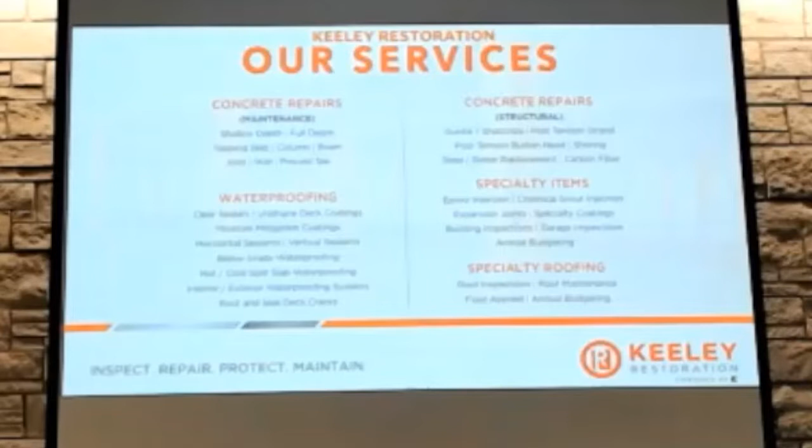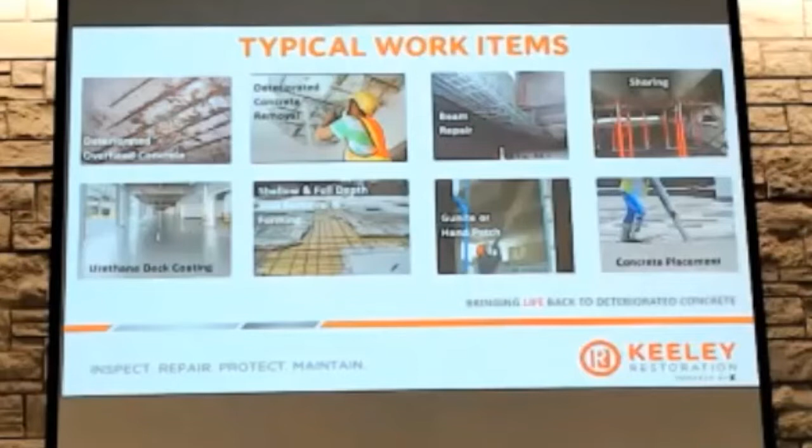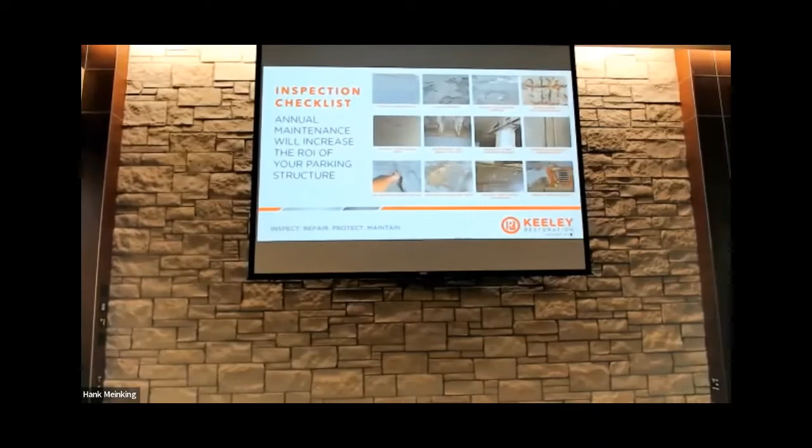Here are two slides on some of our typical concrete restoration projects. Pretty much everything you see is really due to some type of corrosion or lack of maintenance in most cases, which we'll get into more tonight. There's one slide on protective coating in the bottom left. A lot of this starts with us going out and taking a look at a parking garage or structure, identifying the different conditions that exist, and those conditions generally lead us to the next step - usually some type of restoration and then a maintenance program.

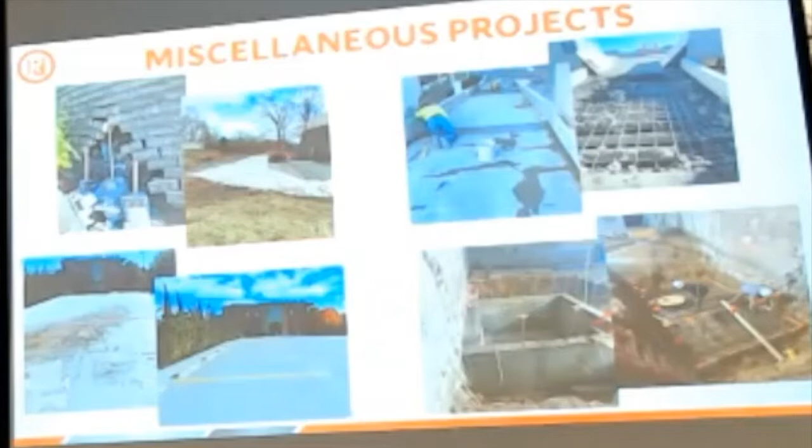The project at the top still has to do with some type of water problems. This particular retaining wall was having issues because the drainage system was undermining the footings, washing the concrete out, and causing structural problems with the wall. So we came in and created a new wall - built a steel cage, shot gunite, air-placed concrete, stabilized the wall, and put in a new drainage basin.

Over here is a typical condition we find where the concrete's deteriorated and the steel is deteriorated. We have to remove the concrete, put in new steel, form it, pour new concrete, and put a protective coating on. This particular owner was doing maintenance - had a protective coating on for probably 10 years - and decided to do another coating on top of that to continually maintain the facility and get a new warranty. That's just some typical concrete work we do.

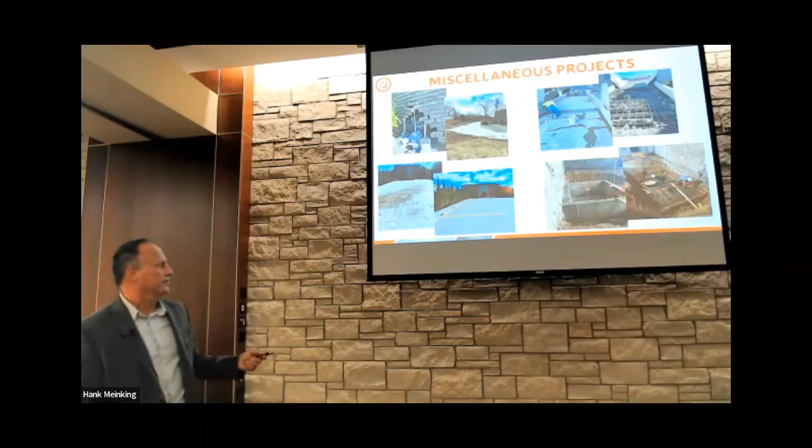So enough about us. Let's talk a little bit about the concrete business in general. Why is concrete restoration a multi-million-dollar annual business?

Let me preface this: if you guys have any questions about my statistics, it all came from Google, so you can check that anytime you want. But an estimated 9 billion yards of concrete was placed over 20 years ago.

So there's a lot of concrete out there that's old and needs repairs, especially structures that have had minimal or no maintenance. And right now they're estimating over 500 million yards of concrete placed every year. This is going to continue—there's a lot of old concrete out there, and we continue to place more every year. Therefore it's estimated as an $18 to $20 billion industry as far as the restoration industry in the U.S.

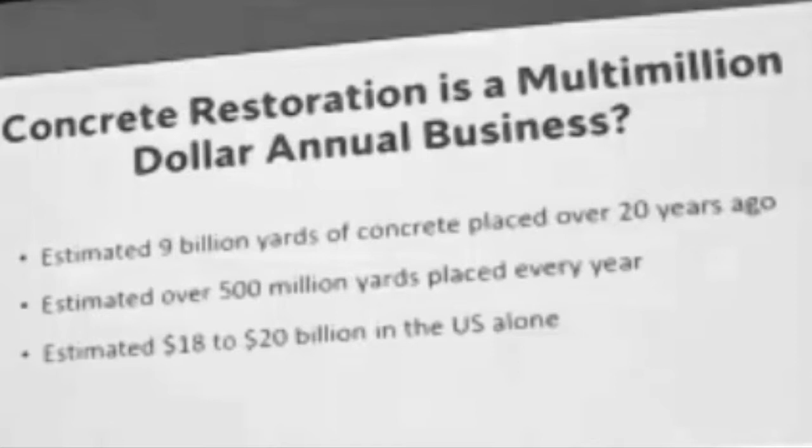We look at it as it all starts with new construction. The point of new construction really determines the quality of the project and how well it's going to last. We're really starting out assuming it's a good design, so as far as we're concerned the design's good, and now it's going to be about the installation.

We think there are opportunities at the point of installation where, with a good inspection process, some of the problems we generally see can be minimized and save the owner a lot of money down the road on the restoration side. Some of the three main areas of concern we find in a garage are going to be concrete cover.

We all know that there's a certain amount of concrete that needs to be over the steel to protect it from water, salt, etc. The other is over-finishing or the mix.

If you add too much water to that surface—and a lot of contractors like to put a little extra water on there to finish it—that creates problems. And the last was...

The drainage piece. Where's the drains? There was a plumbing company up in Omaha, Nebraska, where I'm from, and I'd always ask them, say, Dan, what's the problem here? How come there's always ponding water in the garage? Is it the drain's too high, or is the concrete too low? Is it the plumber's fault or the finisher's fault? And of course he always said it was the finisher. But there always seems to be drainage problems.

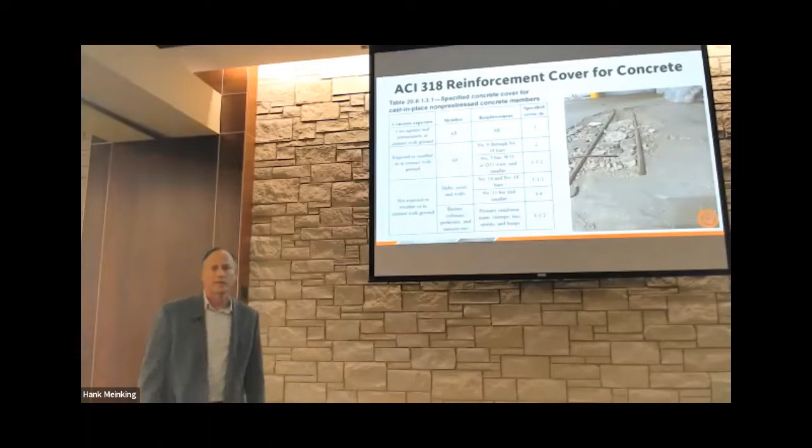ACI calls for a certain amount of steel coverage, and in most cases they're asking for 1.5 to 2 to 3 inches of coverage. You'd be surprised how many projects we find where the steel is only 1/2 inch to 3/4 inch under the surface of the concrete. This certainly could be caught at the time the project is being constructed, and becomes a big problem for an owner down the road. There are a lot of old parking garages out there with minimal coverage. I think people do a much better job now on quality control and inspection to minimize that problem.

In a typical garage we'll see ponding water, whether it's from the drainage slope in the concrete or the actual drains themselves—maybe not enough drains. A lot of times owners will have us come in and look for core holes in the concrete and add auxiliary drains to try to get that water out and displace it so you don't have the ponding water.

I guess another issue during new construction—these are things that really can be inspected and minimized to help prolong the useful life of that structure.

And then the scaled concrete—we've all seen that cement truck out there, and the guys putting a little more water in and spraying it. You put too much water on the top, it changes that cement ratio, and you have that problem. So those three elements, I think, we find on more garages than anything. There are certainly other problems, but those are probably the three main ones we see that contribute to corrosion.

So let's talk a little bit about the concrete material itself. Concrete as a building material absorbs water, it's porous. It gets hard, it shrinks, it cracks. And the last one—it lasts forever, right? At least that's what we all thought. Concrete lasts forever, and a lot of people felt that way, so they didn't do a lot to maintain it.

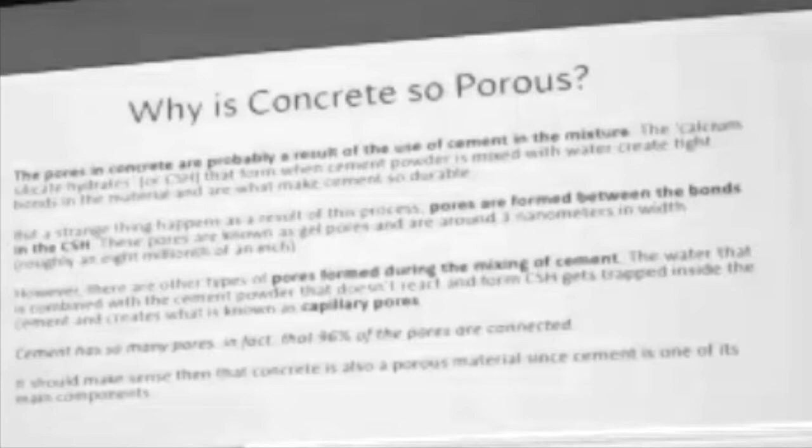So what's the best friend for a concrete restoration contractor? All these cracks. If concrete is porous and it's going to let water in over a period of time, what's going to accelerate that is all the cracks in the concrete, and you'll get cracks in there for a variety of reasons. However, if you don't address the cracks, it just allows the corrosion process to start in and accelerate by letting the water get in.

So an owner could really minimize the problem by taking care of these cracks and having some kind of maintenance program.

This gives you an idea of a cross-section of the concrete and the steel itself, so you have your nice new concrete with no problems. Then as moisture starts to get into the concrete, for a variety of reasons we saw above, you can start that corrosion process.

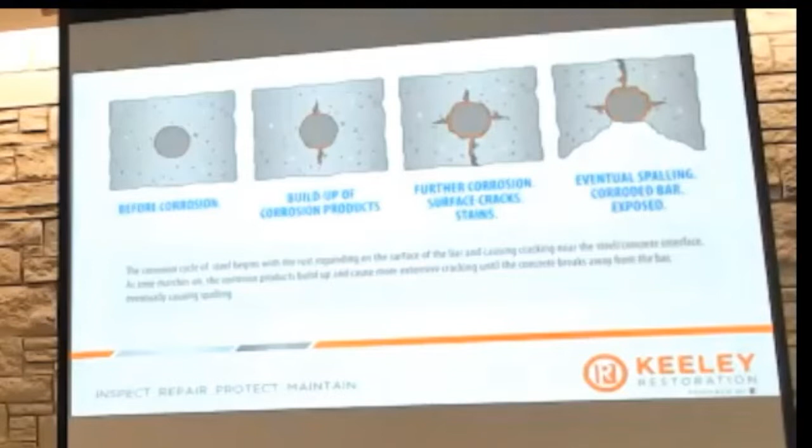Eventually, that steel starts to rust, and as it does, it creates a force that's stronger than the concrete, and then it creates these spalls. This happens to be a downward spall, but you'll have an upward spall as well, and that's pretty common in the industry.

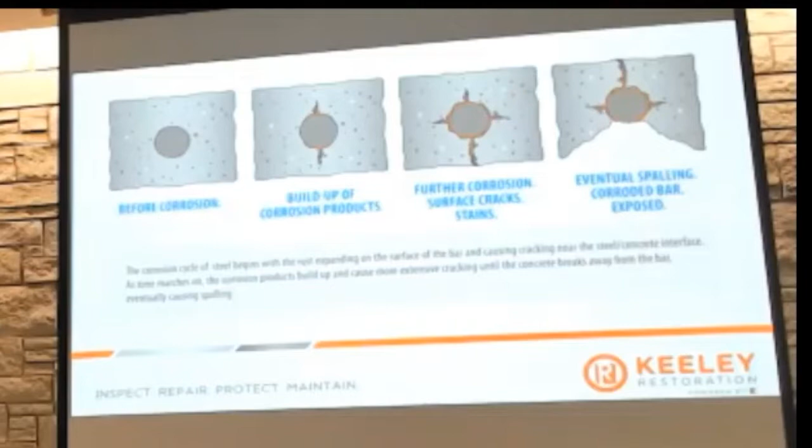So then you say, well, what can we do about it? Why is that such a problem? It's really accelerated if you're in the Midwest or on either coast - look at the environment we're in. As soon as it snows in the Midwest, we bring salt trucks out, the trucks put salt on the street, the cars drive through it and come park in the garage, the snow falls, and now we basically apply chloride to the garages.

And then you get the ponding water, and it sits there, and eventually it works its way into the steel, the same process we saw above continues. You find the same thing on either coast with the salt air.

There's a lot of balconies out there. You go down to Florida, and you're going to find a tremendous amount of concrete restoration work due to the same principles - salt and chloride being introduced to the concrete. I talked to a gentleman at Sika a while back about where their business is, and their biggest market is New York, with one of the top 2 or 3 other markets being southern Florida. I thought, well, why is that? The population in California is pretty large, so why wouldn't that be in the top 2, 3, 4 areas? He said it's due to the number of buildings that you see in Florida.

In Florida, the buildings look like this. In California, they've got mansions sitting on the hill, so you don't have as much concrete exposed. You might have a bigger population, but the actual structures exposed to the salt and chloride is higher in Florida. Therefore, we sell a lot more repair mortars. Did you know that?

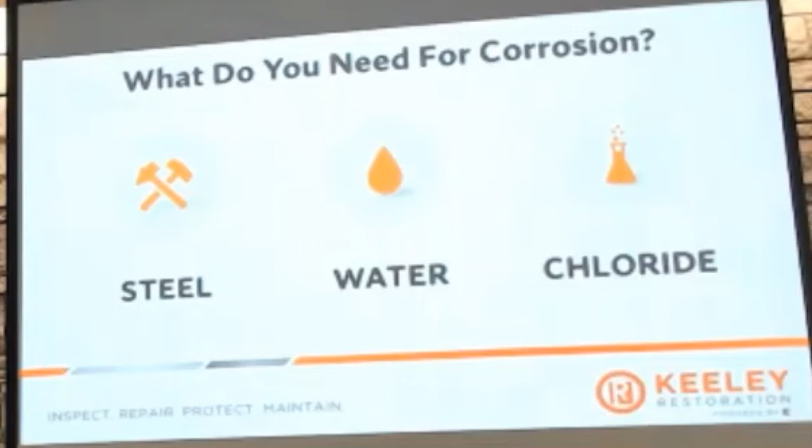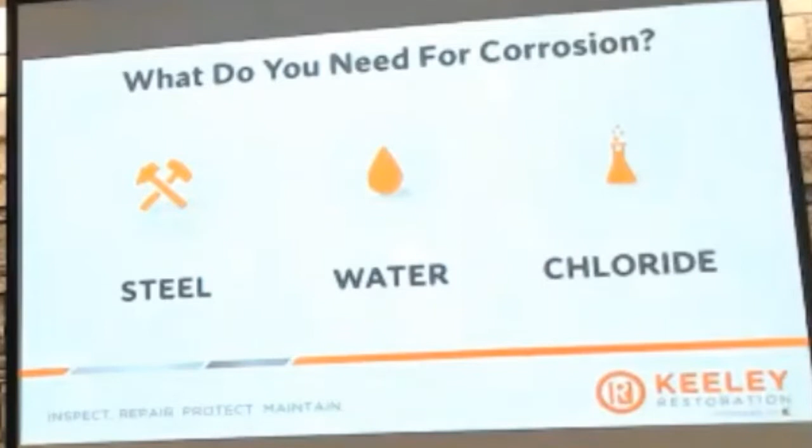So we talk about what do you need for corrosion. I guess we all know what that is: steel, water, and chloride. Are we really doing enough to minimize the amount of water and chloride that gets into the structure? The steel's already there, you have to have it. The concrete doesn't perform, the structural concrete without that steel doesn't perform well, so you have to have it. And then if we can't keep the water out and the chloride out, the corrosion process is going to happen.

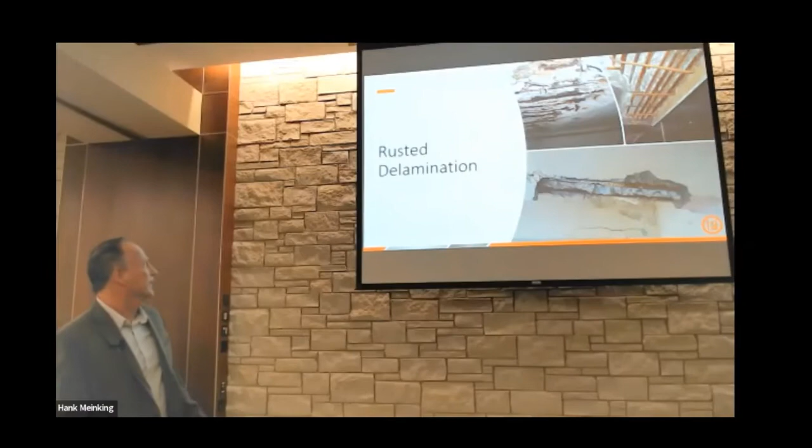So really for us, if you want to talk about maintenance for an owner, this is the process they really have to focus on. Because at the end of the day, you get the rust, you get the corrosion, and this is typically what you'll see in a garage if the owner does no or very minimal maintenance. And I can tell you this is common in any city that basically has salt trucks and uses chloride, you're going to see that in almost every parking garage in any city.

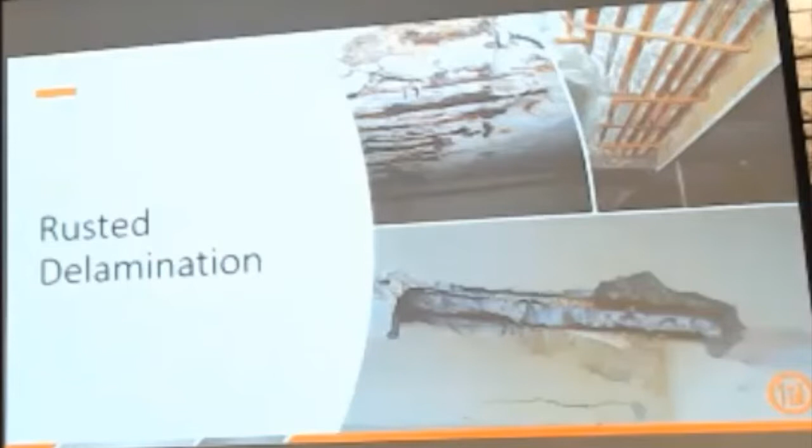And I can tell you, in St. Louis, I could probably name half a dozen garages that look like that right now. And then you wonder, should you be able to park there? And it's amazing that...

I guess from a design side, what's the factor of safety? You're going to add times 2, times 3, but they seem to perform, and the engineer comes in, creates a spec, bids it out, fixes it, and actually the garage performed very well after that.

So really, our goal is trying to reduce the corrosion process, and by doing that we need to reduce the moisture, the exposure to the elements, eliminate chloride, and then somehow protect that concrete.

So how do we do that? How do we go about reducing the moisture? Concrete is porous, so you're really not going to change that. So you have to make it so that it's less permeable. So how do we keep the water from getting in?

Some of the things that we found that work well - I think the industry knows the number one thing you can do is probably right here: the annual inspection. So if every owner were to go out and walk their structure, I don't care, as a homeowner, you really need to do the same thing.

You're going to have problems with your home where water gets in your roof, your windows, etc. These buildings and structures are no different, but some owners do a great job of inspecting their facilities, or they call an engineer to come out, or they call a contractor to come out. But the number one thing to do is inspect the facilities and find out that you have a problem.

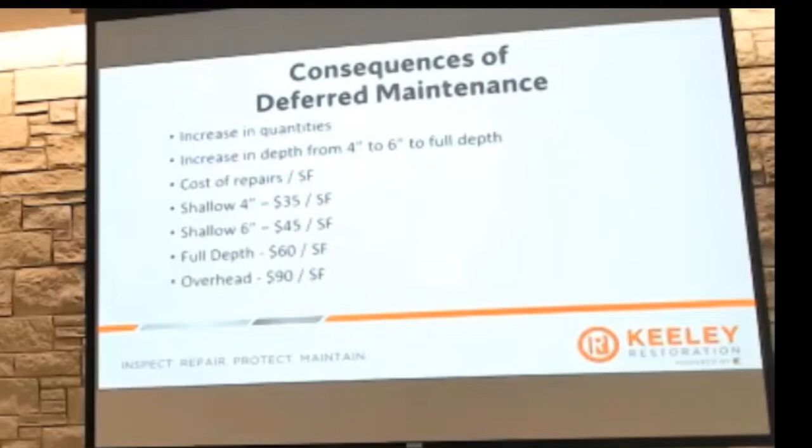So here's an example: a shallow depth repair would be here, maybe at $35, and they're waiting longer, and it's getting deeper here, this would be $45. Unfortunately, now that you have full depth repair, that's the $60. If the owner would have performed maintenance before it was this severe, maybe they could have minimized the repair cost by not having to do the full depth repair.

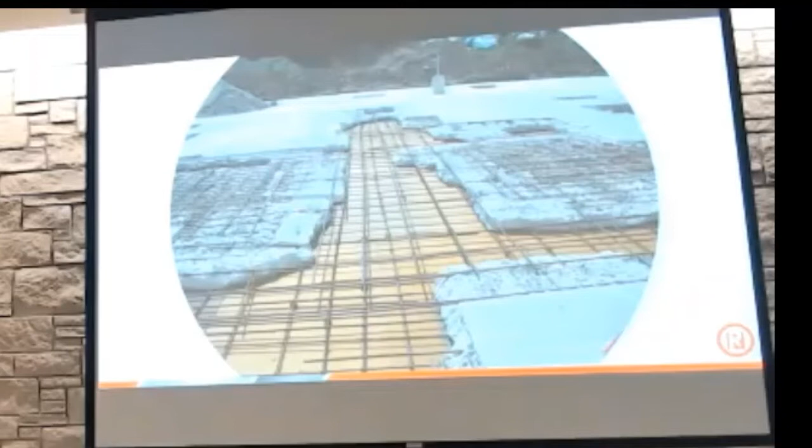At some point, with that full depth repair, or maybe even less than that, don't you run into having to replace the rebar? Absolutely, and that's got to be part of it too. There's a certain amount of cross-sectional area, if the rebar is gone, then they make you take that out, and then there'll be a lap length on the rebar. Sometimes if it's corroded at this point, you have to come back and get good steel and have a certain lap length on the steel. But yeah, it gets very expensive, and they'll come back with green steel and coat it with epoxy or some type of rust inhibitor.

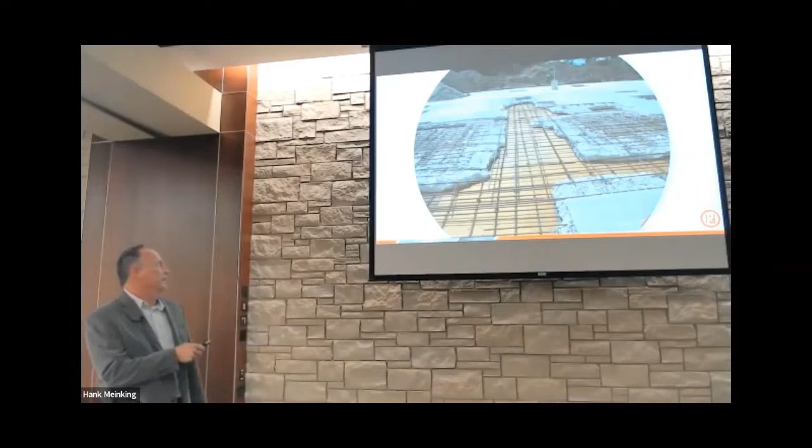As you can see, the amount of work that goes into it increases, and of course the price of the repair increases. Then the ugly one you don't want to have is this soffit repair on the bottom side, and that's the $90 repair. In a lot of cases it's just cheaper - if this here is going to be 35 or 45, and the bottom repair is going to be 90, now you're over $100 some for the repair. You're better off going back and just doing a full depth at 60.

So in some cases, you don't want to do a shallow and a soffit repair and try to leave a couple inches of good concrete. It's just cheaper to take it all out, form it up, and have a monolithic pour, not having patch on a patch, which happens a lot as well. So here are a couple case studies or situations where we've seen lack of maintenance become a bigger problem for the owner.

For instance, right here is an expansion joint, and on this side of the joint is a building, this side's a garage, so you've got a beam on each side below holding the building and the garage up, and the drainage in this garage runs this way. We talked about drainage earlier and how important it is. So on this top deck, when they throw the salt out there and it rains, all that rain and chloride runs down here.

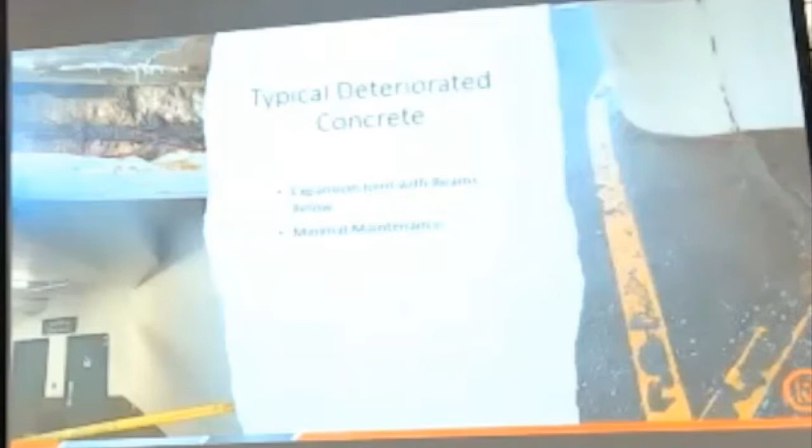You have this open joint that runs down, and right below the joint is this beam line. There's probably only 50 feet of joint there that could have been a $100,000 fix, and now you're going to have a couple hundred thousand dollars of concrete repair, not counting the shoring. You have to have an engineer come in and figure out the loads for the building and garage and shore that up, because you're going to expose most of that bar, and the beam isn't going to be able to perform. It's going to be quite costly just due to the fact that they didn't maintain it.

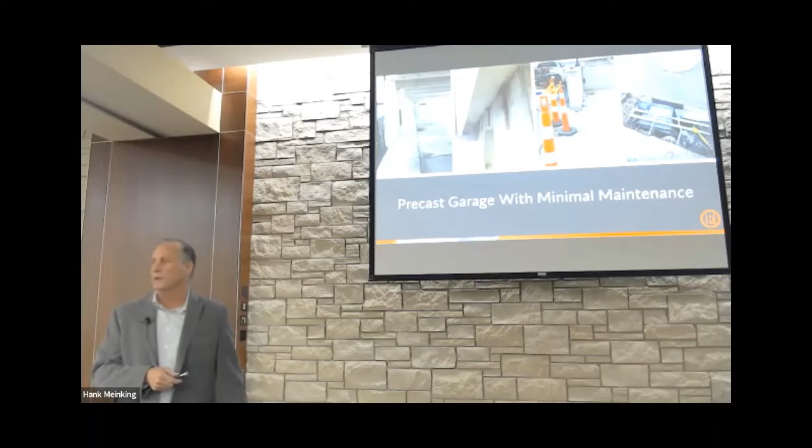This is a typical repair on a precast garage, it happens in pretty much all new or all precast garages. But if an owner were to do a little maintenance and make sure the caulking's in place, put a protective coating around the perimeter at a minimum, that would minimize the restoration or repair cost.

Same thing on the precast at these joints where they have the weld angles or weld pieces. Those get some deflection and will break, or the caulking will open up and moisture gets in, and those will rust. Same problem. A lot of owners will just put coating over the joints as a minimum, or you can do the entire parking garage.

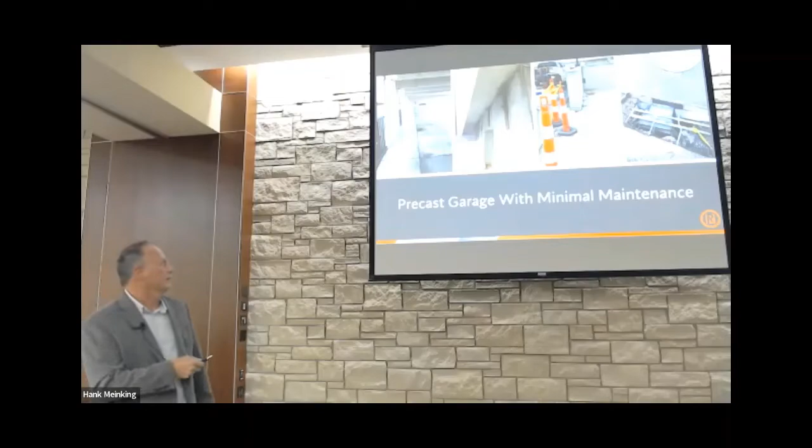Now this particular owner, same type of precast construction, put a coating around the perimeter doing a little preventative maintenance. This coating was down for about 10 years, so it's at least 10 years old, and you can see they're starting to get some wear on it, and they actually wanted a price to recoat it because it needed it.

You can also see these red dots, they went around and everywhere they saw cracks they put a red dot. They had the engineer go out and identify the cracks, and part of this package was to route and caulk those cracks, which was probably done in the past. They wanted to keep up with their route and caulking, and bring this coating back to life, and then look what the underneath side looks like.

Their support angles here are not corroded, they look very good, and this is probably 20 years old and looks great. Where this other one isn't as old as the garage, it's in much worse condition, and there's still many brackets in that garage that need to be chipped out, cleaned up, exposed, and at some point they'll have to put that coating around the perimeter.

So you can really see the difference between doing the maintenance and not, with very minimal work here, other than some miscellaneous caulking and redoing the coating. But on this garage they've basically eliminated all of the concrete restoration.

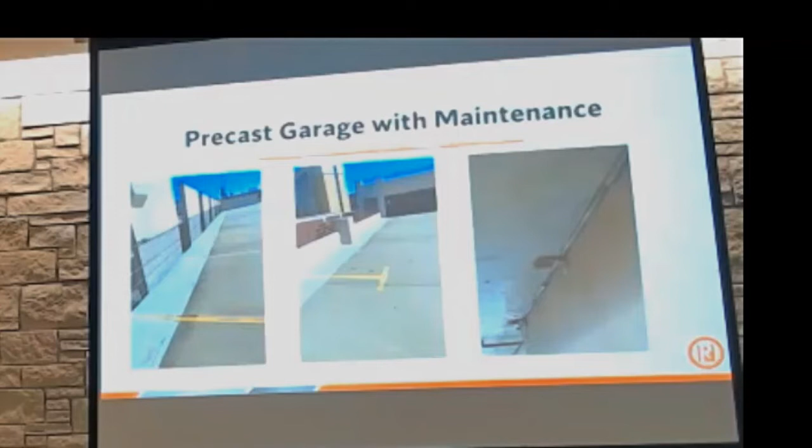And so ultimately, that's what you get. If you put the coating down at the beginning and maintain it, you get a garage that looks nice inside. I'm using some pictures that make the garage look really pretty, but at the end of the day, if you do that, you'll have a nice garage and minimize maintenance costs, and the cost of ownership goes way down.

And then there's been some discussion about failures - have there been any garage failures? I can tell you that in the 30 years I've been doing this, I've heard of a couple here and there, but nothing really significant. I don't think that's a problem.

There are some garages that are probably borderline. I've seen some garages where engineers have come in and said you had to shore up some levels, and they shut some levels off from parking, but they were caught in programs and shored up and shut down before they had failures.

I think a big reason for that is we have some conscientious owners, and maybe a big part of it is the dollar side we showed you - when a shallow depth repair goes to a full depth repair, the price goes way up. If you're not a good owner and don't do maintenance, the price to own that parking garage goes way up, and people realize that, so they don't want to be in that position.

And then the other piece is that cities and municipalities are really creating programs so that there are inspections on these garages in most cities.

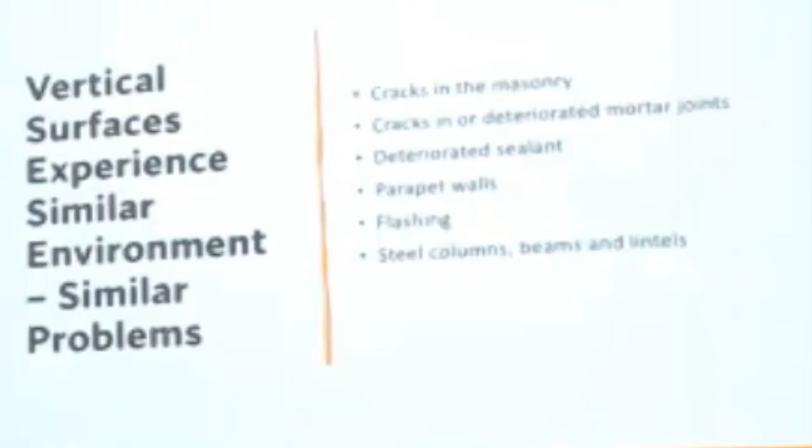A lot of those old buildings had a vertical crack that would run at the corner. Because one side of the building the sun would be shining on, and the other side would be in the shade, one side wants to expand and the other wants to contract, creating a moment at the corner. So the building wants to pull itself apart and create its own crack. We'd have to go in and allow the building to move there, put an expansion joint on that corner and let it move. I think that's probably practice now, whereas back then it wasn't.

These would be typical problems we'd see on masonry buildings where the owner would not do maintenance. After a certain period of time, when that mortar starts to go, the same thing happens with freeze-thaw cycles - moisture gets in there and starts to pop the masonry. Here you see the face of the masonry coming off, so the brick gets porous and the face comes off, water gets in there, and it just keeps popping that brick off.

Usually the wall ties rust on a masonry unit so it's basically not going to hold the wall in place, and you typically see this right here - you can see that caulking line. The wall ties are bad, the building's starting to move, and the masonry's bulging right there, probably about an inch. So you have to really pull that, take that masonry down, and rebuild it. In some cases, if it's not too far out, you can drill in the mortar joints and put some anchors in to hold that in place.

This is pretty typical of what you'll see on lintels - a lot of times people will caulk the lintels and hold the water in, so when it rusts the water can't get out, or the lintels might even be set back a little bit where it retains water. The flashing in there isn't adequate, but this is pretty typical - you'll see it in a lot of old structures.

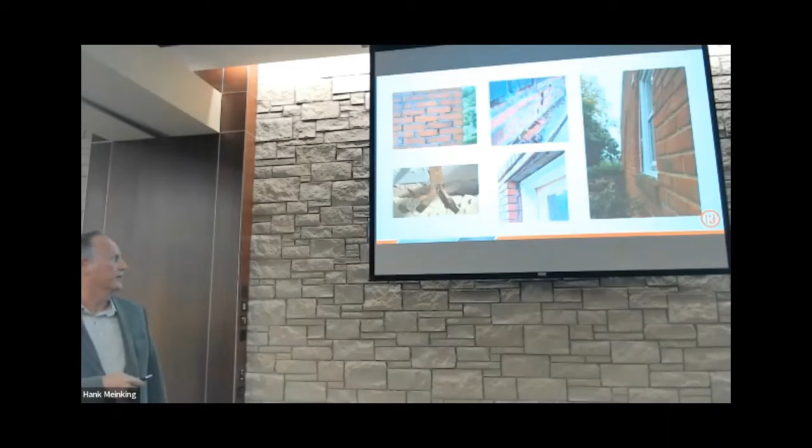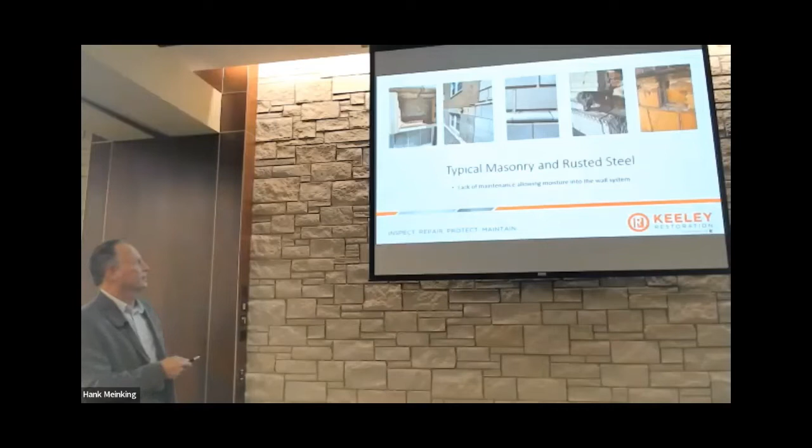This was a particular project where an owner contacted us to fix the concrete beam going into a parking garage, and above it was this terracotta. When we looked at it, we said the concrete needs to be chipped back about 6 inches, and the anchor for the steel angle goes into that concrete. But when we chip that concrete, the angle is going to want to fall, since that's supporting the terracotta veneer. So we told them we have to tear the veneer down so we can fix the beam. As you can see, there's a variety of different problems, and this is all from lack of maintenance - it started with cracks in the masonry not being repaired in a timely manner.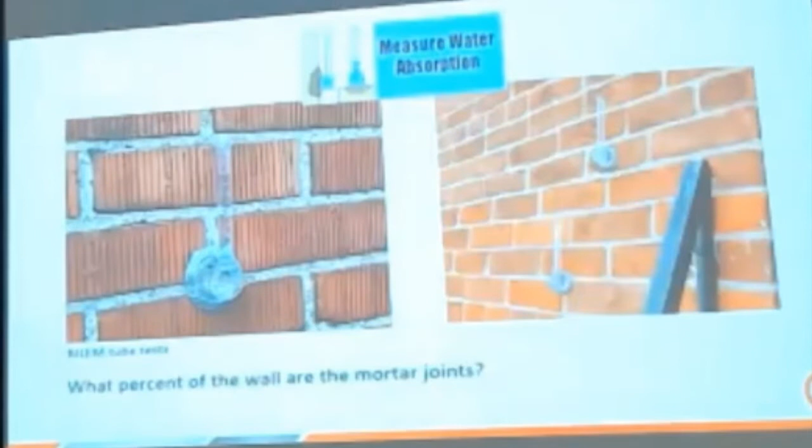There are some things in the industry - a pretty economical way of determining the amount of moisture that gets into a building is a RILEM tube test. I don't know how many of you have actually heard of a RILEM tube test - so few of you have. But it's really a pretty accurate test to let you know the porosity of the substrate you're working with. You can put this test on the brick face itself, fill this vial with water, let it sit for about 20 minutes, and it will simulate a 60-mile-an-hour wind, something of that sort. The head pressure it creates will let you know if that building's taken in water, and if it's going to need a clear sealer of some sort.

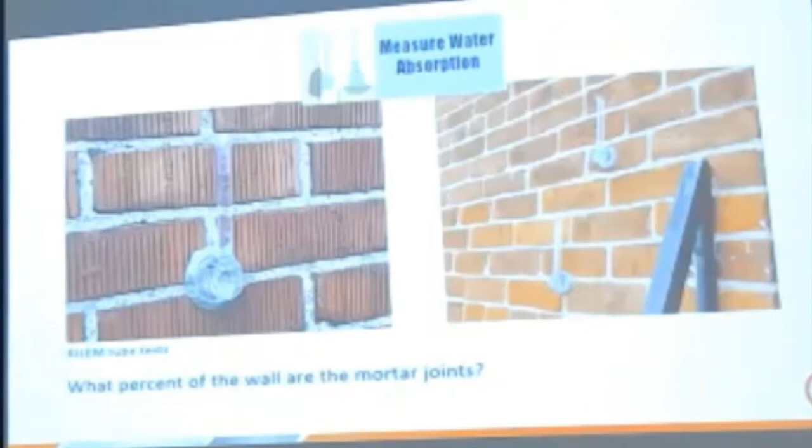So you want to do the test on the brick, and you want to do it on the mortar joints as well. So the question is: what percent of a wall, a typical modular brick wall, is mortar?

17? You're pretty close. I think 20 to 25% is what I always heard, 22%. I Googled it just to verify again, I got 20 to 25. When I grew up in the industry, I was told 22.

But it is a big percentage of the wall, so if an owner wants to neglect the mortar joints, when it's 20% of what's going on there, that can be a big problem. So those mortar joints need to be tested as much as the brick surface itself, the face itself. And if it takes in quite a fair amount of moisture, then you'll need to put a clear penetrating sealer on.

So delayed maintenance, open mortar joints, wall ties - you get problems with mold and masonry, sagging lintels, rusted columns, and interior damage, and I think all owners have to deal with that. So to me, it just seems like it makes sense to do the maintenance and eliminate these problems. However, people don't, and therefore that's one of the reasons we're all in business, to help people get rid of those problems when they delay the maintenance.

The maintenance program here would be very similar: the annual inspection, pointing the joints, sealing the windows and joints, wet sealing the windows. We find that to be pretty common on the aluminum glass structures where the gaskets around the windows get old and crack and shrink, and a lot of moisture gets into the building.

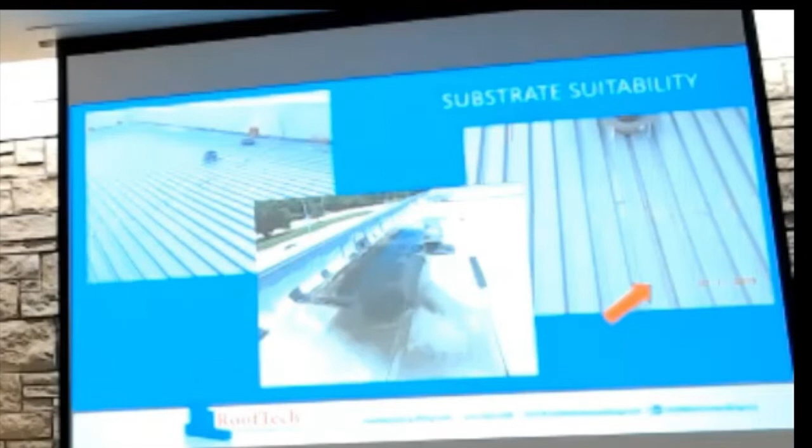So we're going to start with substrate suitability. When we walk onto a new construction job site, the first thing our qualified project consultants do is review the project manual with submittals to make sure everything seems suitable from that standpoint and verify the materials. Day one, we're going to walk the job site. Now at this point, unfortunately, if we're on site, that means the contractor's on site, the materials are on site, and the contractor has already accepted the conditions. Once they've done that, they're contractually bound to start that project and take ownership of it.

It's not uncommon for us to find overflow drains mixed and matched with standard drains, which creates an issue, especially in a tapered setting.

Also the fact that overflow drains need to drain out completely differently, typically through some sort of scupper or exterior-faced, daylighted drainage. We see this a lot more often than we would like - the roof gets installed, and we realize that the drains are mismatched.

Another problem, scuppers. How many people go on commercial roofs in this room? A lot, okay great. Isn't that how the water always ponds where it shouldn't, specifically at scuppers? That's really trade coordination. Although this is an older roof, it's probably been like that since the day it was built. The carpenter who installed the wood nailer, or whoever cut the hole in the wall, didn't understand the thickness or the dynamics of that roof.

We like to sump these. This is a pretty simple fix. But unfortunately, whoever built the wall, whoever installed the wood, had nothing to do with the contractor that was installing the roof. The contractor installing the roof has to have some level of production and efficiency - they're not going to stop what they're doing that day to revise that wood nailer, because that's not under their contract.

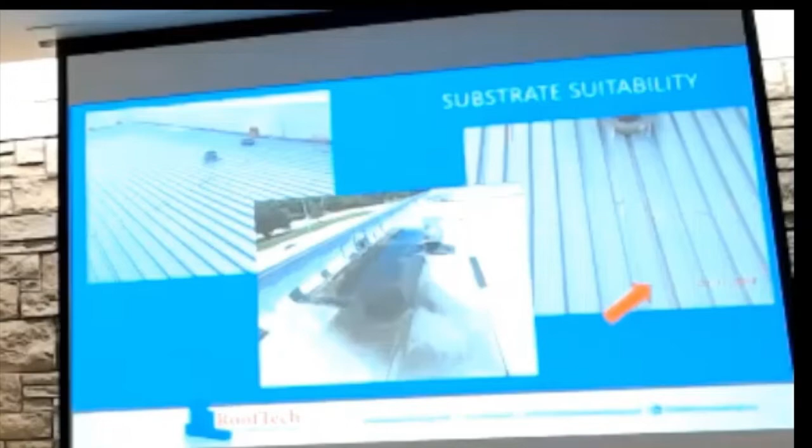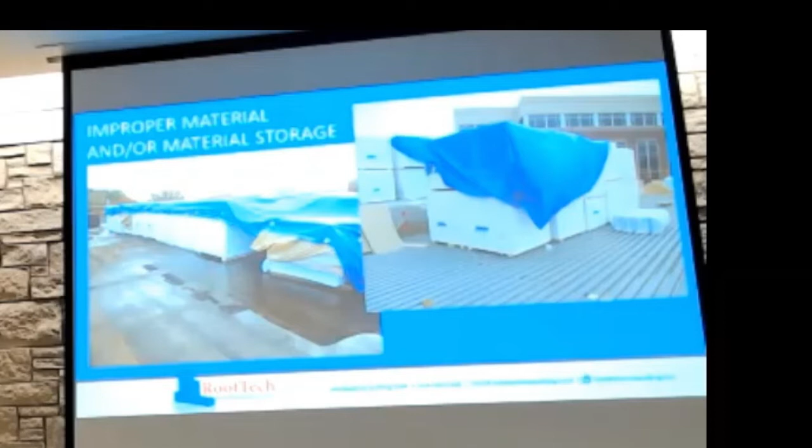Improper material storage is a big issue here, because right now as we get the rainings, we have some pretty stringent criteria on our projects for how these things have to be stored. We don't like them on the dunnage - this shipping dunnage is just polyiso, the same thing we're going to put on the roof, and it absorbs at a high absorption rate. We've actually found it sitting in areas like this where 2.5 insulation boards up the bundle, it's saturated - it's absorbed that much water into it. So you've got to throw that material off the job site.

Sometimes material, especially now, is getting delivered on site and not being installed for 3, 4, 5 months. During that time it's becoming weathered, exposed, saturated, and then dried out. I don't think most manufacturers are going to want material that's been compromised to be within their roof assembly and covered under that warranty. We've also seen premature failures where the roof was examined - we pull the membrane back, look at the cover board and the insulation, and it's discolored. They can tell it's been exposed, and the manufacturers will walk through those steps because the material was not suitable when it was installed. These are things we want to be very aware of.

Cold weather installation - I want to beat this up for a second because this became a hot button about 3 years ago. The photo on the left is pretty obvious. Unfortunately, we had a contractor on a large warehouse running and gunning - got to a Friday, ran out of membrane. A lot of the insulation was left exposed along with the cover board. They thought they would make it through Monday, but an unexpected storm blew through, and we have this condition.

It all has to be removed and disposed of. New insulation has to go down. The contractor's going to be on the hook for that - regardless of what the forecast said, they own that material. It's no longer suitable. Photo on the right.

About 3 years ago, middle of the winter, it was about 30 degrees for weeks on end, and we started monitoring these projects that we're a part of. We find out that in 1 week, 5 different contractors are starting projects in sub 40-degree temperatures. The rule of thumb in commercial roofing, anything adhered for the most part, is you don't install unless it's 40 and rising.

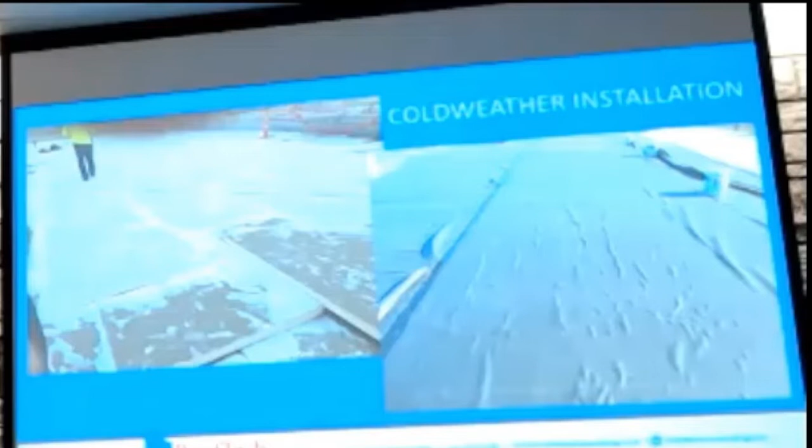Those are some ugly conversations, and unfortunately, we were the bad guy. We didn't tell them to install when it was 25. We didn't expect it, and to this day, we don't really allow it for that very reason.

Improper roof installation - so actually on this project, they had to install the bay doors, wind uplift became an issue, and actually tormented that roof. I think this one actually got insurance involved because it just basically started pulling fasteners out of the seams - mechanically attached EPDM.

On the right, we designed to a particular attachment rate for any of our substrates in a metal deck or in a wood deck. These fasteners have a particular placement rate, a particular space from the corners, and depending on where your layout is, you're going to have some level of fasteners in the center, corners, perimeter. Fastening rates can go from 5 or 6 in the field, 8, 12, 16, as many as 32 we've seen, but there's a prescriptive methodology on where those fasteners are placed. This is not it.

On a mechanically attached system, this would be a little bit more hidden. We can still find it. Fortunately, we saw this before the membrane was installed, but if a membrane was installed, fully adhered, this becomes apparent. So when you're watching roofs become installed, it's not hidden - it still becomes transparent. There's going to be some transparency through the membrane. Once the membrane is glued down, each fastener plate shows through. You can mark them, you can do whatever to verify the attachment rate.

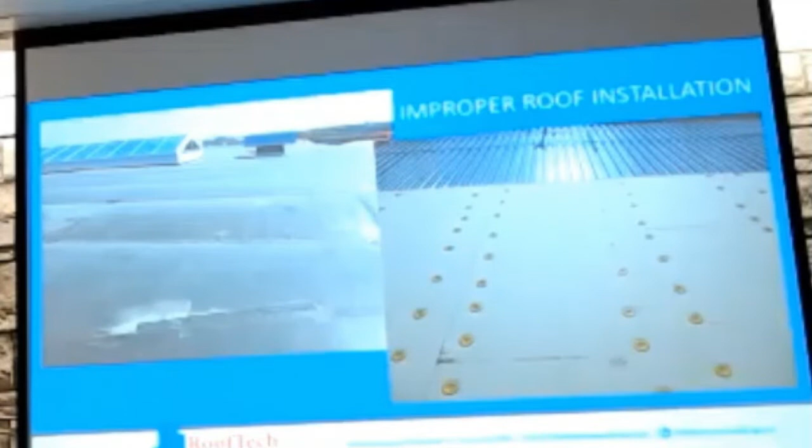But if no one's doing in-progress quality assurance, check this fastening rate. This is a big deal, especially on FM insured facilities. A lot of designers are now designing to an FM 1-60 or an FM 1-90, just as a prescriptive attachment rate for roof performance. Doesn't really mean it has to be mutually exclusive with being FM insured - it's just a prescriptive methodology for attachment performance.

What I've learned, if it's FM insured, you have to do it the way they do it. If it's just designed to FM standards, each manufacturer might have been able to pass a less expensive attachment method. You're exactly correct. So there's a couple other different performance measures, ASCE, some things like that about wind performance attachment rates. For example, when we design roofs, we typically reference an FM wind uplift performance and maybe an FM 1-49 for wood nailer attachment. We now have our own wood nailer attachment detail we've developed and provide. So those things to be very aware of. If it is FM insured, it becomes a little bit more complicated too as far as the submittal process.

Some of the other things that are tied to this: having a RoofNav, which is a pre-tested assembly. But they'll walk you through the process.

We're fortunate to have an FM office here in St. Louis, and they're great folks.

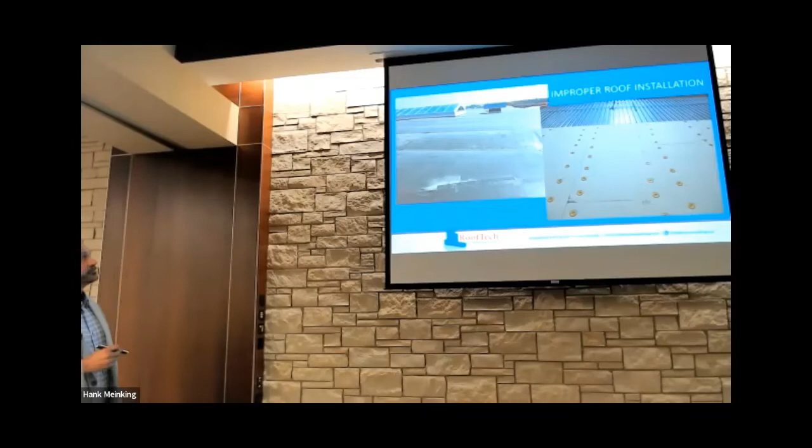I just don't know if I understand what I'm seeing here, and I've verified that I am seeing it. Is the picture on the left roofing, like a building?

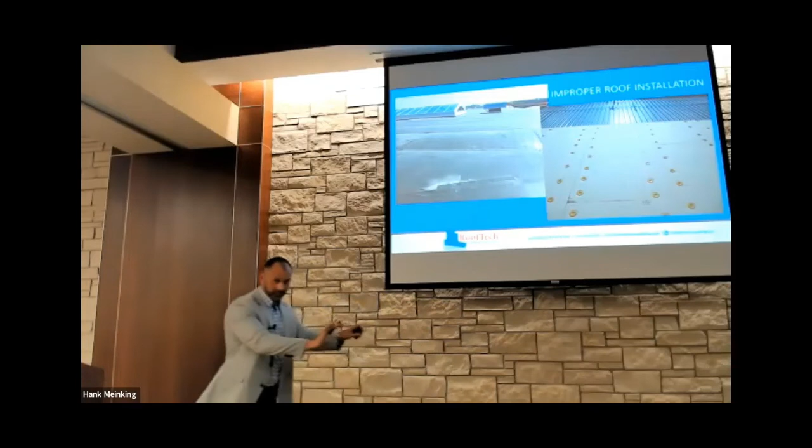Yeah, mechanically, that's a great question. So in a mechanically attached roof, we're going to say that we have a metal deck and some sort of insulation installed properly, we'll make that assumption. On a mechanically attached single-ply roof assembly, your attachment for your sheets is basically along your laps.

It's designed to move and billow, but at some sort of extreme, typically during wind uplift, it'll stretch, where it'll actually pull the fasteners out of the deck. It'll never sit back down again.

We hear this a lot, though I don't hear it as much anymore. We used to hear clients calling - if you can see a roof going down the highway, a windy day or a storm is blowing in, and there's a big differential in air pressure, they'd say 'the roof's blowing off my building.' Well, it's not - it's designed to billow to some level.

They actually perform uplift chamber testing at FM's facility where they'll force air under, kind of see how high it'll go before it does fail, before the fasteners fail.

If it's a TPO roof especially, or a PVC, once it pulls on that seam, it's not rubberized, so it doesn't go back. That seam kind of pulls out, and you just can't correct it. There's no way to fix it at that point.

On those white roofs where you experience this, you're walking across and it seems flat, you almost feel like you're being tripped, because everywhere there's a seam that's been pulled, you don't really notice it with the bare eye, there's a hump. So every 10, every 12 feet, depending on the sheet layout, you're going to have that little bit of a ridge.

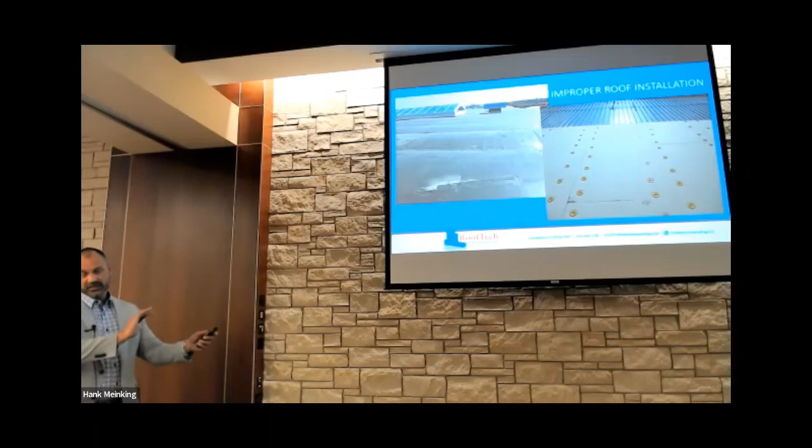Now on this one, again, this was a large industrial building. It had a ton of bay doors, and they hadn't installed them. When they did that, we had a front come through, and it changed the dynamic pressure of the building exponentially, way beyond what this thing was designed for. Had the doors been installed, the same front moves in, everything should have been fine.

This is something we don't really mark on a lot as a QA firm, but ponding water, especially in a single ply setting - one of the funny things we talk about is drain setting. Like that first slide, this is our overflow, which is great, but it's also sumped. That thing's always gonna hold water.

We find a lot of designers and some owners, developers, really hang their hat on this - they don't want any ponding water whatsoever. Personally, I don't look at ponding water as some sort of mutually exclusive issue with roof failure, especially now. This much is going to likely dissipate within 48 hours, which is kind of the rule of thumb - if the water is gone in 48 hours, it's not an issue.

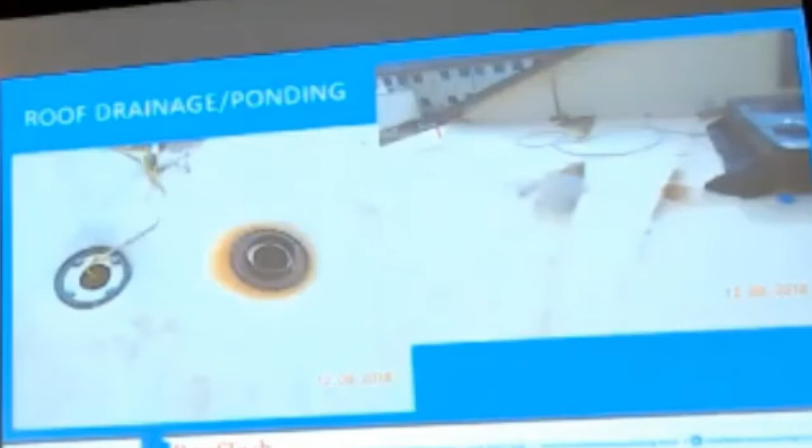We find this a lot too in improperly installed crickets or tapered systems, where it just runs into a wall, or maybe there was a belly in the deck. A lot more common in remedial, or where we experience wood deck. We don't see these bellies as much in metal deck applications, or opposite, concrete.

What happens in 14, 15, 16, 18 years when this roof has to be replaced? It creates a nightmare - we basically have to start pulling off the sheathing and build up. We see this a lot. In remedial applications, we expect it, but in new construction, this should not be happening. We should always have allowable flashing heights to allow for not only the installation to be proper now, but the installation to be proper when it comes time for roof replacement.

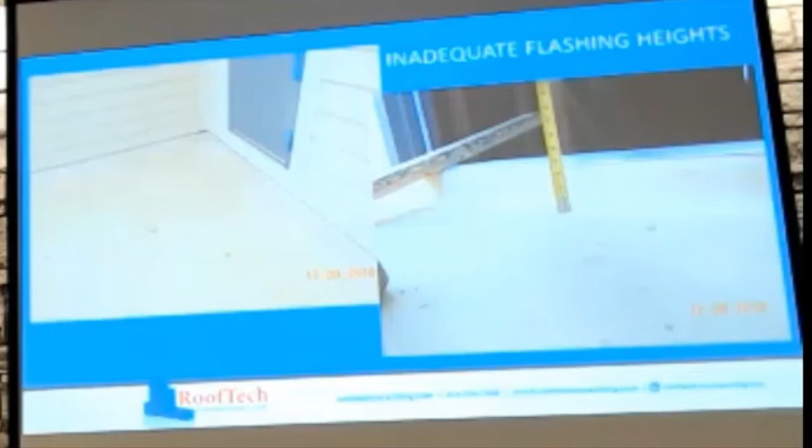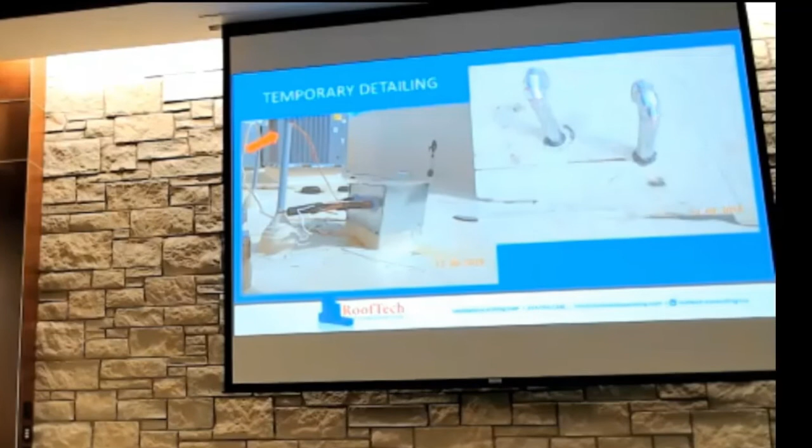Another big thing we encounter is keeping the insulation dry. Everything's installed properly, and they're starting to do interior finish work. Now we're having penetrations arrive on the roof, punching holes, and it's not uncommon for those holes to be punched and not addressed, flashed, or handled properly.

These are punched through and they just used a sealant, like a Vulkem, around the base of it. That was fine, but unfortunately we also find a lot of times they'll use asphaltic roof cement, which doesn't play well with TPOs or PVCs, and you have to clean it. A lot of times we tell them to cut the membrane out. So temporary overnight tie-ins are a big deal.

Also, if we're finishing the inside with drywall, finishes, or flooring going down, and this leaks, if they install this temporary sealant and think it's going to last 6, 8, 10, 12 days, it probably won't. So we end up with a water intrusion issue on our new finishes.

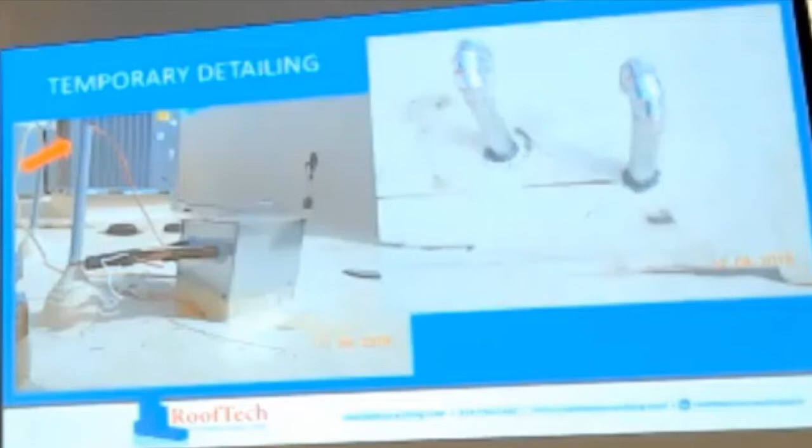I love this photo because of what takes your eye. It kind of looks like a mess, but it's not. The issue is this pipe, open right to the sky - it should have some sort of a cap on it. This was actually an active leak on this project. See, this sealant was installed, and the contractor chased this thing down, but couldn't figure out what was wrong with it. It was that pipe right there.

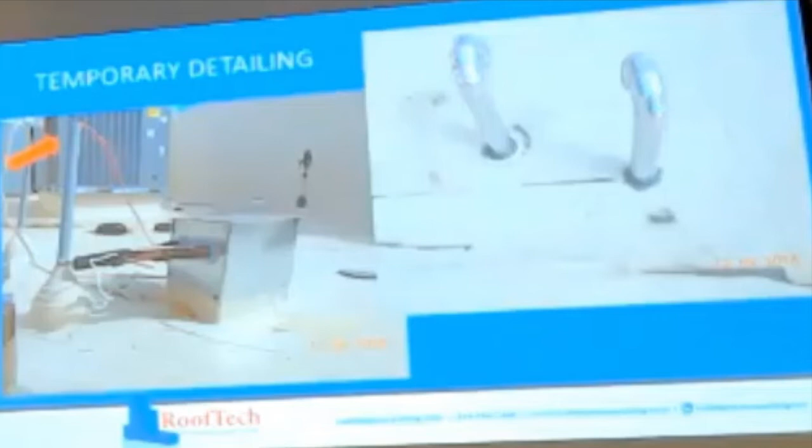It's not uncommon for somebody to run temporary wiring through something like this. So the roofer's been up and tied things in, then a secondary trade comes in and modifies this condition to accommodate what they're trying to accomplish. The roofer's off site, a storm blows in, and we don't have an issue - until, in worst case scenarios, a temporary tie-in fails and the water actually saturates the roof, which can be more detrimental depending on the interior finishes, because now we have to tear out sections of the roof to mitigate the moisture.

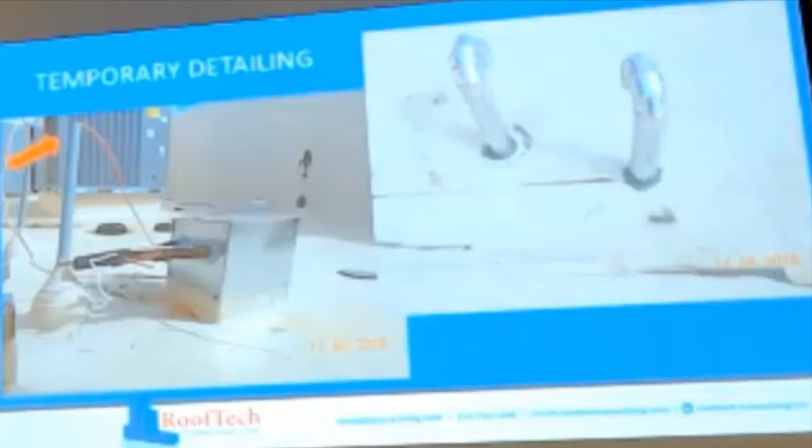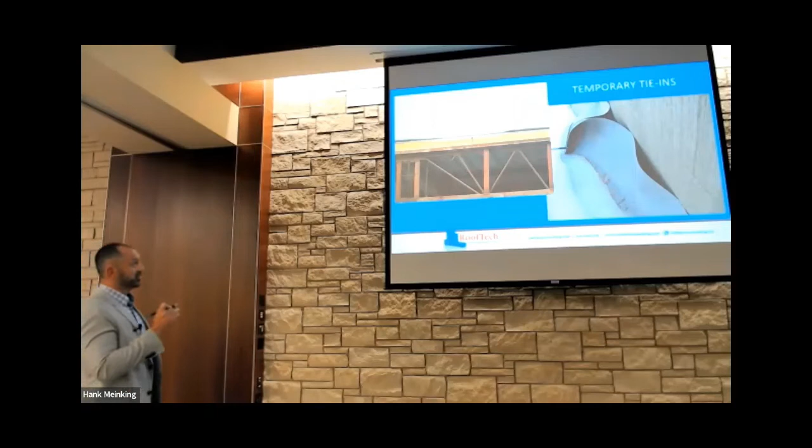Big issue here with the temporary tie-ins - we've all seen this, right? You've seen a job site with the membrane hanging over the side of the building, roof insulation exposed, and it stays exposed for weeks until the other trades complete the work or the sheet metal contractor arrives to finish the detailing. We often find these temporary tie-ins leak.

We can see what's happening here - they left that, snow built up, snow got behind here, and you get a torrential pond inside this building. For example, I took this photo about two weeks ago in Kansas City. This was totally saturated - you can actually see the watermark on the insulation. I promise you that insulation is still there today as construction has continued.

It looks like fiberglass, is that what it is? It's actually polyiso, just aged polyiso, unfortunately. And it soaked up water? So when we talk about absorption rates, that's a great question - cover boards and everything have different saturation rates, absorption rates. Polyiso will dry eventually if it's exposed.

There's some question about how it affects the R-value, which is probably making a mountain out of a molehill, to be honest. But if this gets wet and we throw our TPO membrane over the top of it, it's not going to dry anytime soon. I don't know how long it would take to dry - have you guys run numbers on that? I wouldn't think it would ever dry out. Is that ISO? Not once it's encapsulated. I thought it was supposed to be closed cell. It will become saturated, and it'll hold just like a sponge.

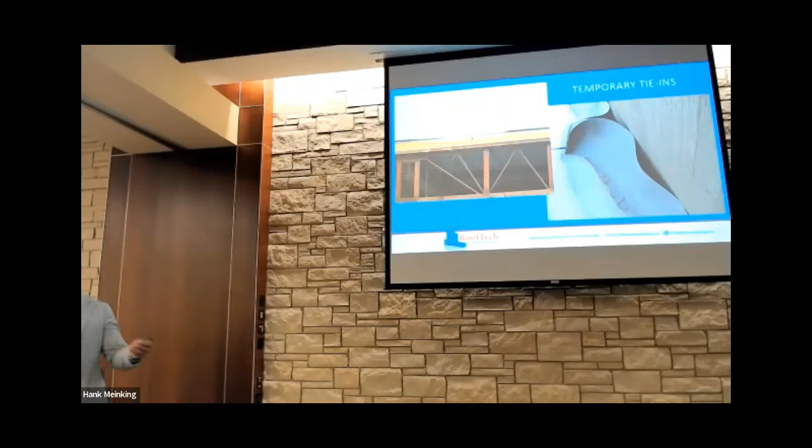Things like EPS or XPS, we use for waterproofing because they're impervious to water. EPS is basically like your styrofoam cooler material. But you don't have the compression rate with that, and there are fire rating issues and other problems. Obviously polyiso is kind of our A1A of roof insulations currently.

But this is very common, unfortunately - we see a lot of it. And this also ties back to our material storage. Again, if it's wet, we've walked onto job sites and just put X's on boards and had them remove it because they installed it wet or marginally wet. So it'll dry out - well, like Chip said, unfortunately it doesn't dry out, specifically once it's encapsulated. Talking about permeability, this TPO membrane is impermeable.

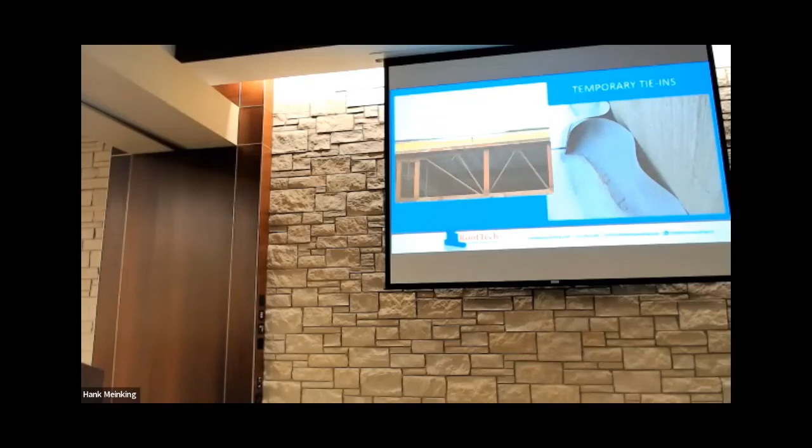Obviously it's a waterproofing material for roofs, and it's horizontal, so once you put that on top of it, the moisture has nowhere to go. It'll create blisters. Even worse, saturated insulation will prematurely fail the roof.

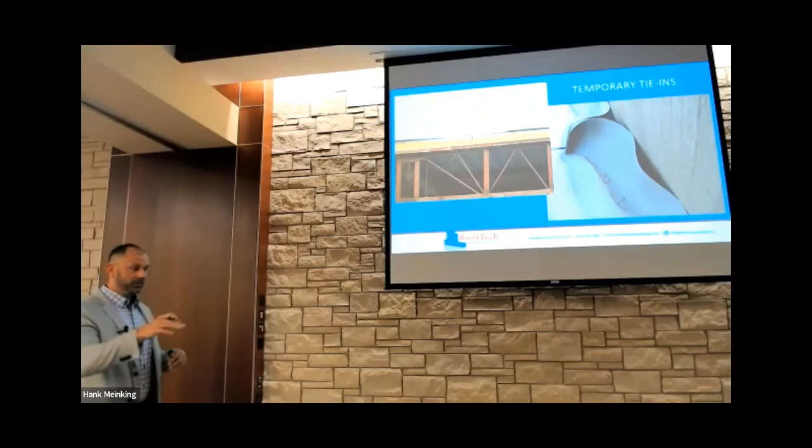Sheeted TPO has three components for the most part. You have your underside, which would be black or gray. You have some sort of scrim, which is your reinforcement, and then your weatherproofing package, which is the outer part you see, which is white, gray, tan, or whatever color you choose. That outer waterproofing is roughly, give or take, different manufacturer to manufacturer, only about 20 to 23 mils of a 60 mil sheet.

So once we start cooking that, day over day over day, and then we get excessive heats, and we're cooking this membrane from the inside, that's not what the weather package is for. That's basically for structure of the sheet. That's where we see the premature failures. The membrane becomes brittle, starts to discolor.

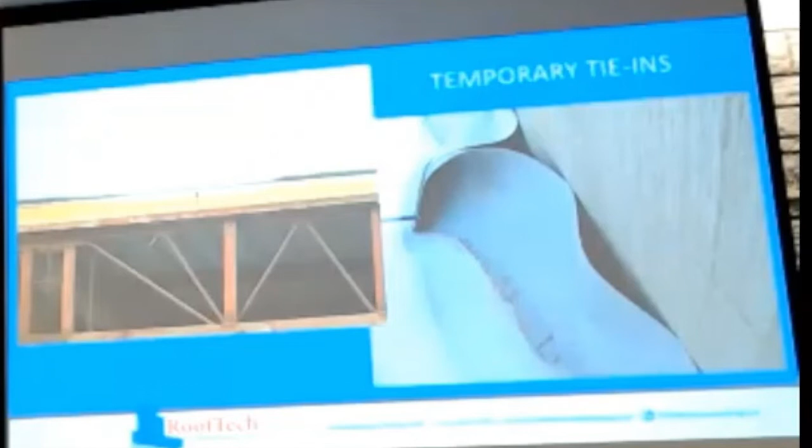There's an NRCA stat that the average commercial low-slope roof in the United States performs for 14 years. Not 20, not 25, not 35, and all these crazy numbers we think the warranty means. But when you start doing this, that's why.

I took this picture last week, unfortunately. This is a hospital, never really had a final check. We've done everything right, the contractor's done everything great, handed the keys to the owner. Everything's occupied. Now you have these kind of phantom leaks. It's a checkout, right? It's not a big deal. We'll chase them down. This building had been open for 12 months.

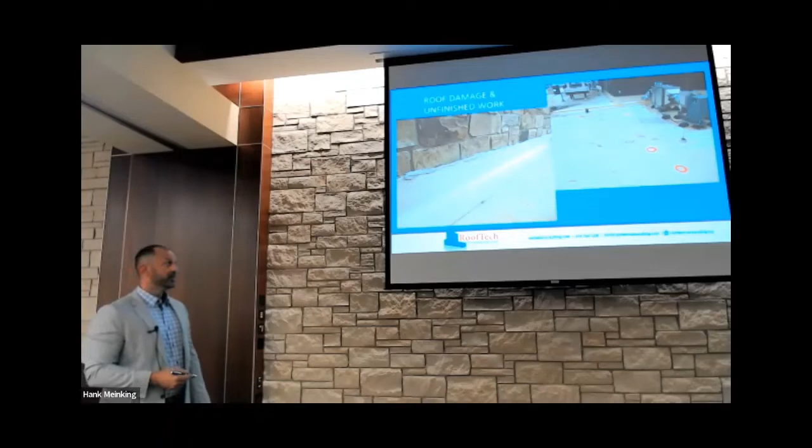Nobody had ever done a formal inspection. They would spot check and run the leaks as they occurred. They didn't look down as they were walking those leaks. The first door we walked out of was right here. Every one of these was a puncture in the roof. You can almost see the puncture. It was that significant. It's really not that hidden.

Right over what would have been in this area, there were about 8 more. One of them was the size of a quarter. Pushed it, water came out.

We're supposed to have a counter flashing. Everyone else had beautiful counter flashing, but it was a hidden spot on the project. It was a canopy, kind of tucked below another canopy, butted up against this beautiful wall. So it just wasn't really visible, it wasn't visible from the inside of the building. We were on the roof, we turned around, and I just started laughing.

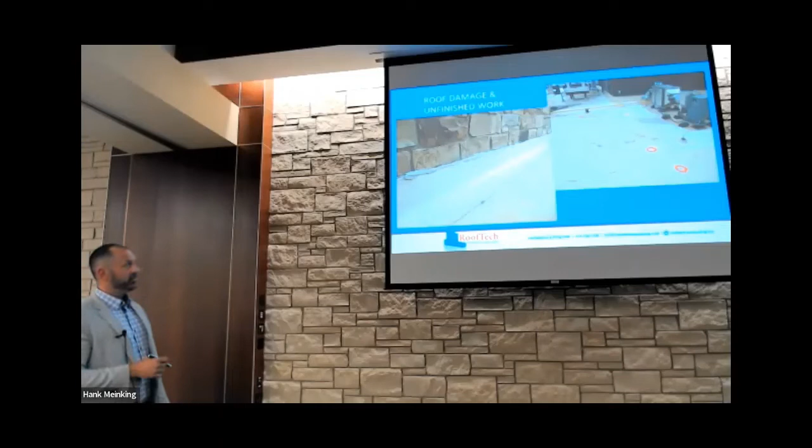So we talked about maintenance. As a third-party consultant, we do a ton of inspections, as I mentioned, so roof design and oversight, we're professionals. We do a lot of design review of other people's design, because where a lot of designers have to worry about a million components to a building, we don't. We're very, very specialized.

Designer involvement during pre-construction, we see a lot of submittals that come in that don't match the design at all. And the design, or the submittals, are typically being reviewed by the GC or someone else. Things are being approved that the designer of record probably should be aware of. We see that way too often. And typically once the submittals are in, unfortunately the materials have already been ordered, so we kind of get the cart before the horse at this point.

We have registered roof observers. I want to say we employ about 50% of the registered roof observers in the state of Missouri.